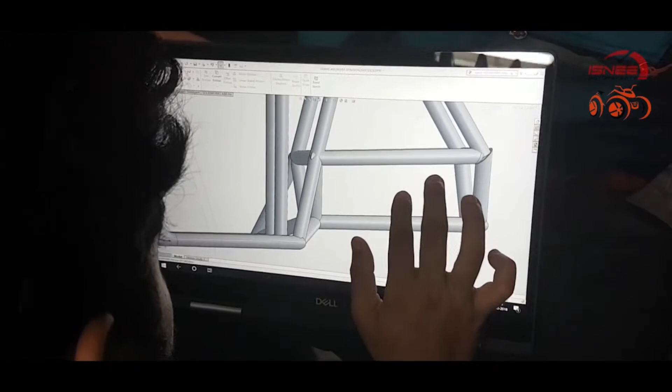A design competition for engineering students which challenges them to build an all-terrain vehicle capable of running on all kinds of surfaces, be it mud, sand, rocks, mountains, everywhere you go, the quad will go. Quad Torc is basically a design challenge for budding engineers in which they learn to design, they build the quad, they bring it for testing, they compete with other vehicles coming from across the nation, and people from various industries judge the vehicles based on design, manufacturing, performance, and dynamic tests.

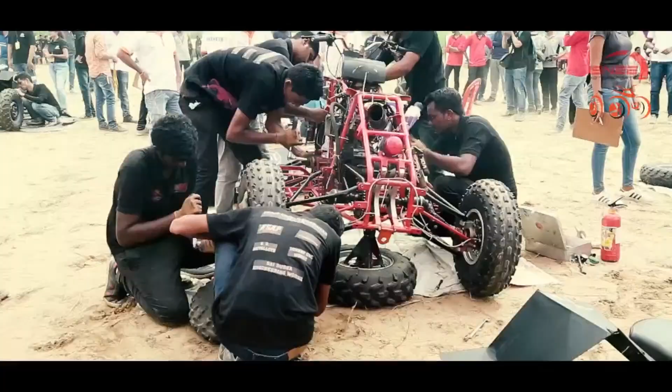A vehicle can run in dynamic events only if it clears the technical inspection and brake test. But before technical inspection, these ATVs need to clear a drop test where they are dropped from a height of 6 feet, which is really breathtaking, because if at this point the vehicle fails, it would be really hard to fix it. Design of any automotive or manufacturing depends upon various factors such as aesthetics, performance, and ergonomics.

Whenever we design something, we initially make a scale model of the design so that we can figure out exactly how our end product is going to look like, and we should design to make our vehicle structurally fit and able to take proper dynamic loads.

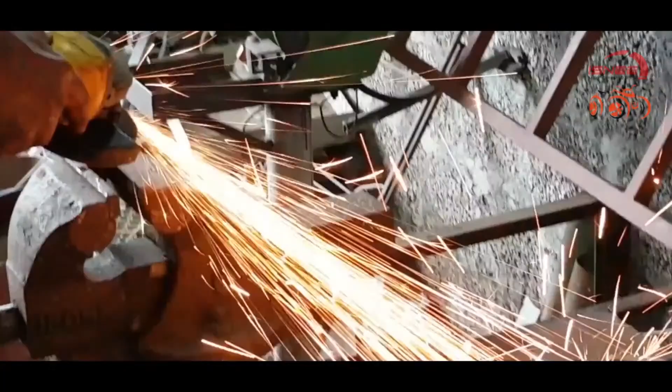If we consider manufacturing of a chassis, we consider various factors such as node-to-node triangulation of the entire chassis so that the entire load is distributed evenly over the chassis, and the damage or failure of any part is very rarely done.

Quad Talk, the off-road championship by ISNEE, I frankly joined engineering because of my passion for automobiles, and I found this amazing team and this amazing event. All that the college does is provide you with the theory, but this event and my team has provided me with real life experiences, so that I can be a problem solver when I go out of college. When I graduate and go to the industry, I'll be able to solve numerous sorts of problems that other people are not capable of solving.

Quad Talk has given me a complete adrenaline rush, not only from viewing those quads running on the tracks, but also as an engineer. I came across a lot of problems that we as a team had solved, and the satisfaction you get after solving all those problems was an amazing experience. So yeah, I really enjoyed the whole thing.

I'm from Team Hyperion, I'm a professor there at SBM Polytechnic. We are the first time participating in such an event. Though it's a polytechnic, we were a little apprehensive about how our team would participate, but...

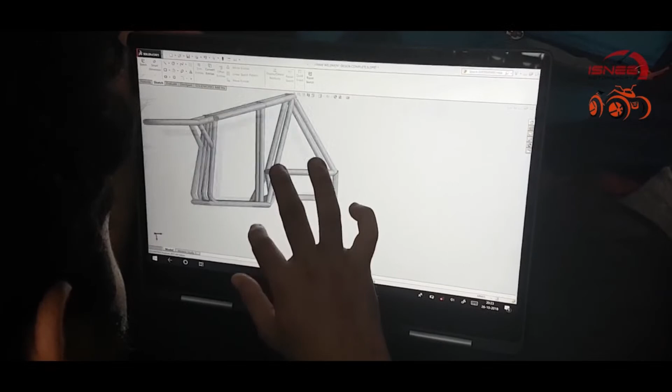A design competition for engineering students, which challenges them to build an all-terrain vehicle capable of running on all kinds of surfaces, be it mud, sand, rocks, or mountains. Everywhere you go, the quad will go. Quad Torc is a design challenge for budding engineers, in which they learn to design and build a quad, then bring it for testing. They compete with other vehicles from across the nation, and people from various industries judge the vehicles based on their design.

It's been 2 years since I've been coming to this event, Quad Talk. I'm here representing Team Technocrats, and this is my first year at ISNEE Quad Torc 2018. Manish, representing Team Legion from KCD. Mitesh from Team Hyperion. Very happy being here, a healthy competition.

Quad Talk can't be described just in words. It's more of a feeling that one can perceive by being a part of it. An intensive design competition that needs passion, dedication, and determination. A challenge that takes almost a year to design and build a vehicle fit for the competition. And finally, all the ATVs arrive on the racetrack to prove their mettle.

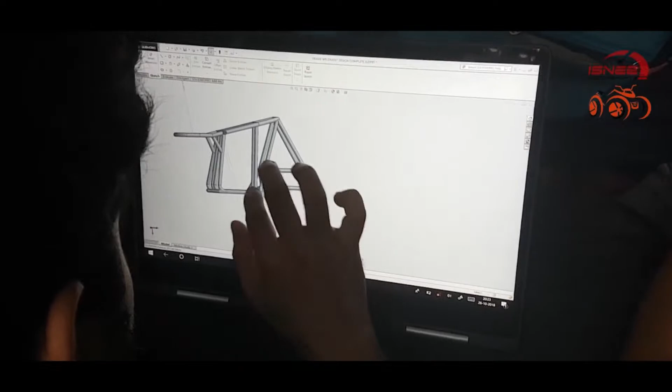A design competition for engineering students, which challenges them to build an all-terrain vehicle capable of running on all kinds of surfaces, be it mud, sand, rocks, or mountains. Everywhere you go, the quad will go. Quad Torc is a design challenge for budding engineers, in which they learn to design and build a quad, then bring it for testing. They compete with other vehicles from across the nation, and people from various industries judge the vehicles based on design, manufacturing, performance, and dynamic tests.

A vehicle can run in dynamic events only if it clears the technical inspection and brake test. But before technical inspection, these ATVs need to clear a drop test where they are dropped from a height of 6 feet, which is really breathtaking, because if at this point the vehicle fails, it would be really hard to fix it.

Design of any automotive or manufacturing depends upon various factors such as aesthetics, performance, and ergonomics. Whenever we design something, we initially make a scale model so we can figure out exactly how our end product is going to look, and we design to make our vehicle structurally fit and able to take proper dynamic loads.

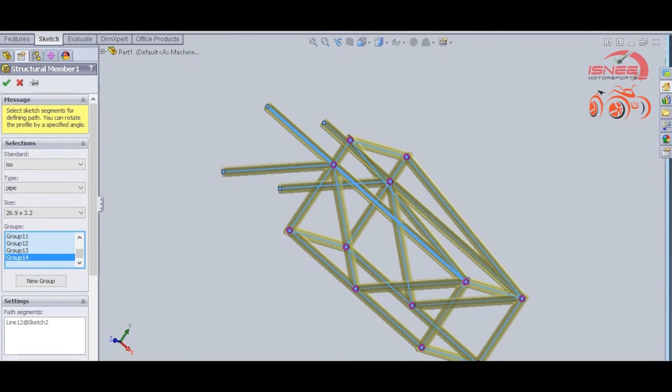If we consider manufacturing of a chassis, we consider various factors such as node-to-node triangulation of the entire chassis so that the entire load is distributed evenly, and the damage or failure of any part is very rarely done.

Quad Talk, the off-road championship by ISNEE—I frankly joined engineering because of my passion for automobiles, and I found this amazing team and this amazing event. All that college does is provide you with the theory, but this event and my team have provided me with real life experiences, so that I can be a problem solver when I go out of college. When I'm a graduate and go into the industry, I'll be able to solve numerous problems that other people are not capable of solving.

Quad Talk has given me an adrenaline rush, not only from viewing those quads running on the tracks, but also as an engineer. I came across a lot of problems that we as a team had solved, and the satisfaction you get after solving all those problems was an amazing experience. So yeah, I really enjoyed the whole thing.

I'm from Team Hyperion. I'm a professor at SBM Polytechnic. We are participating in such an event for the first time. Though it's a polytechnic, we were a little apprehensive about how our team would participate. But right from the beginning, our team manager, team members, principal, and all the management people were very supportive, and they gave us a great boost from the start, which motivated all our students, and they worked very hard.

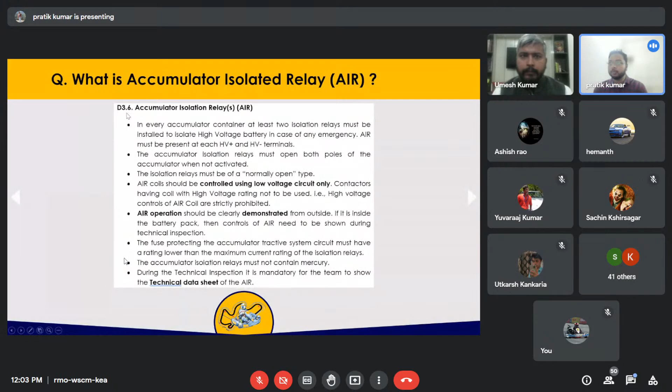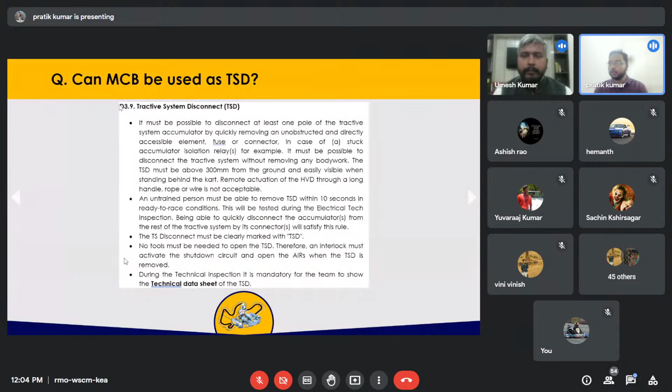Now the next question: what is HVD? In one place it is mentioned as HVD in the rule book. HVD is high voltage disconnect, which is nothing but the synonymous word for TSD, tractive system disconnect. So tractive system disconnect and high voltage disconnect are pretty similar, you can consider it in this way.

Coming to the next question: can we add supercapacitor along with battery? Yes, we are allowing supercapacitor. It is possible to use it in parallel, in whatever configuration you want, along with battery or anything. But it should adhere to the rule book mentioned for the accumulator. That is the only condition here.

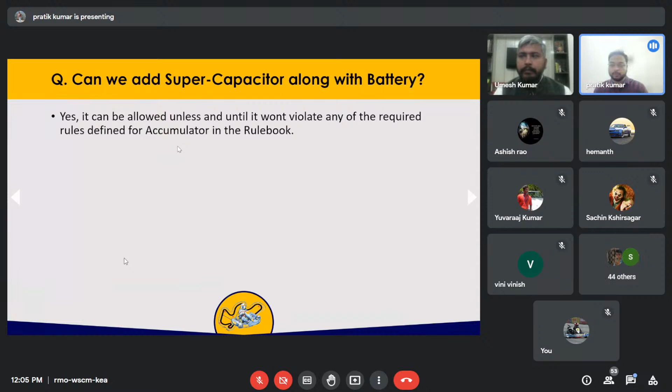Moving to the next question: what is the GLV system ground? GLV stands for ground low voltage. Those working with electrical systems are aware of the chassis ground. So GLV system ground is nothing but the chassis ground for low voltage systems.

Moving to the next one: for PSS, power shutdown switch, any specific company requirement? Similarly, for this also we don't have any specific company name or something. The only requirement is it should adhere to rule D3.15. This is a sample picture, you can say the PSS should be looking something like this. You can use any company, there is no restriction. That's all.

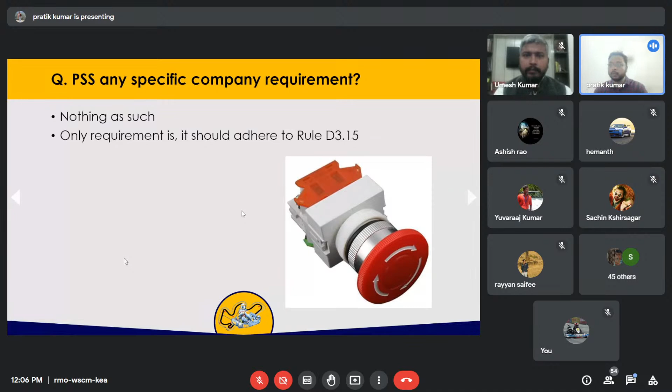Moving to the next one: what is the reference position for the second PSS switch? I want to add one point here, this is the new rule added for this 10th GKDC, it was not previously there. It is mentioned in D3.15: there must be two PSS or kill switches in the kart. The first PSS must be rigidly mounted on the steering wheel where the driver can easily operate it, and the second PSS switch should be placed on the left side of the vehicle on the roll hoop at an adequate height such that in an emergency situation the bystander can operate it easily. The PSS must be easily visible to someone standing near the kart.

So PSS should look like this, and one should be placed on the steering wheel for the driver, and the second one on the left side of the roll hoop. If suppose this is the car, so somewhere near the driver back, left side of the roll hoop, should be used. I think a diagram is also present somewhere. Let me check if I can show you by end of this session, the exact place where it should be mounted.

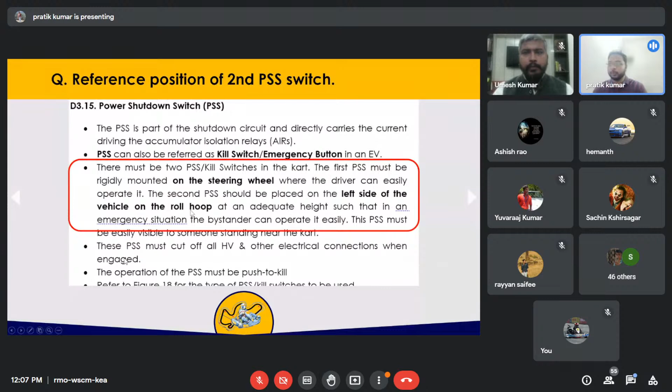Now we'll move to the next question: accumulator container specific thickness. There is no such boundary on what exact material you should be using. We have the requirement D3.4 and D3.5 for the accumulator container, so you should adhere to that. Apart from that, you are free to choose any material, as long as it adheres to these rules. It should be rigidly mounted, and all rules followed. You can refer to these two things, 3.4 and 3.5.

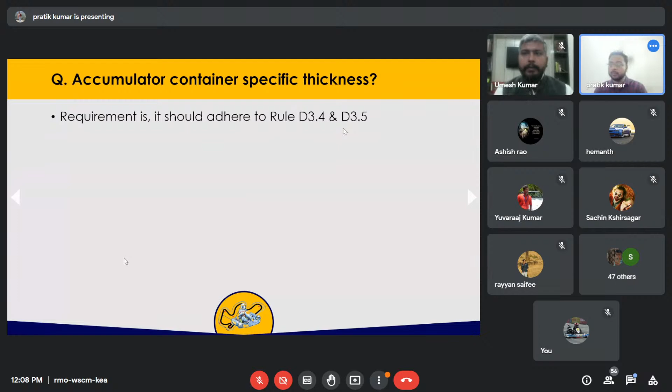Going to the next one, about the BOTS, brake-over-travel switch. Any specific company requirement? There is nothing as such. The only requirement is it should adhere to rule C2.19. This is a sample picture of how it should look, but it can be anything else also, like the PSS switch you are using. Those kind of devices can also be used as a BOTS. Only thing you need to consider is that C2.19 should be fulfilled. That is about the BOTS.

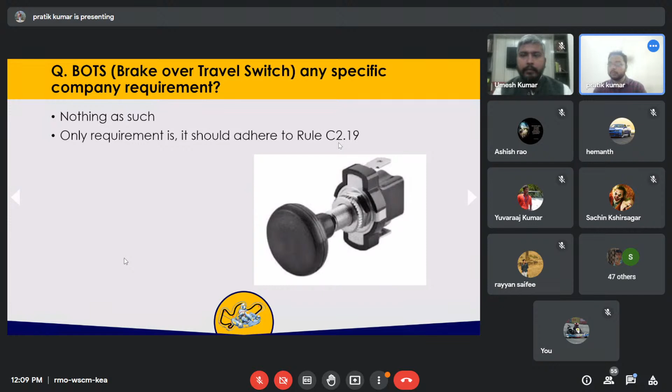The next one, I think the last one: someone asked to please explain the low voltage shutdown circuit diagram. It's a new thing recently added to the 10th GKDC rulebook. Before going to the exact diagram, I want to discuss why this is necessary. What are the different types of circuit? What's the difference between low voltage and high voltage? In any EV, when designing, there are basically two parts: one is the high voltage section, used to power the tractive system, and the second is the low voltage, which operates the driver or other control circuitry. The low voltage circuit diagram is also known as the shutdown circuit, because if something happens to this low voltage circuit, your high voltage circuit will finally be disconnected, through the AIR, the accumulator isolation relay.

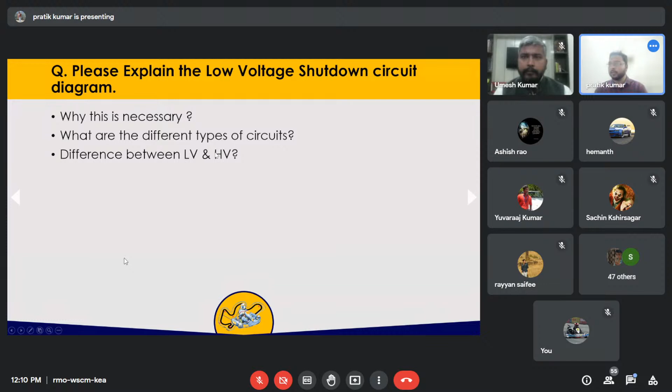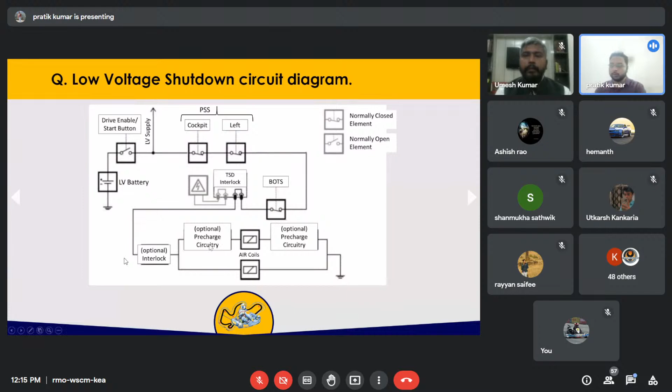And after that, it will split up into two parts. One will go to the AIR, suppose the top one is for the positive terminal of the accumulator, and second one is for the negative terminal of the accumulator. So first one will go here, or you are free to use any pre-charge circuitry also for EGKDC. This is not a mandatory rule, but if you want for a safety purpose, you are free to use any pre-charge circuitry if you require. It can be placed here as per the diagram.

And the second one is again the optional pre-charge circuitry, you can add here also, that is not an issue. As per your design, you are free to choose anything. And the second part is completely for the negative part of the AIR.

So now I think I'm done with the electrical related queries. If anyone from the audience is having any query, they are free to ask me.

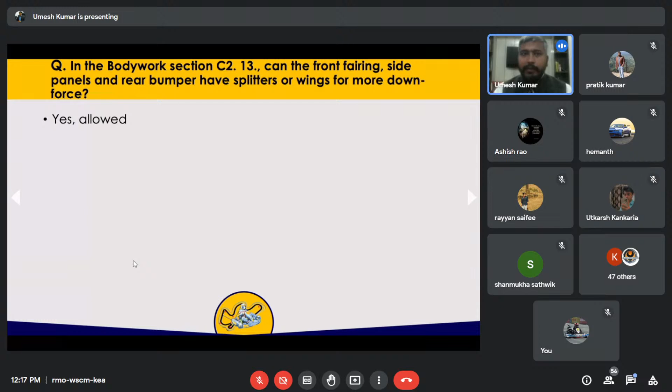Then, are adjustable aerodynamic packages allowed in the bodywork? Yes, they are allowed. But make sure when you talk about the aerodynamic packages, you have a proper report. It should not be like you attached anything, if that is not working, if that is just for the aesthetic or better looking, that's okay, no issues. But when you claim that you have the active aerodynamic, meaning it is working, then you would need to present the reports as well.

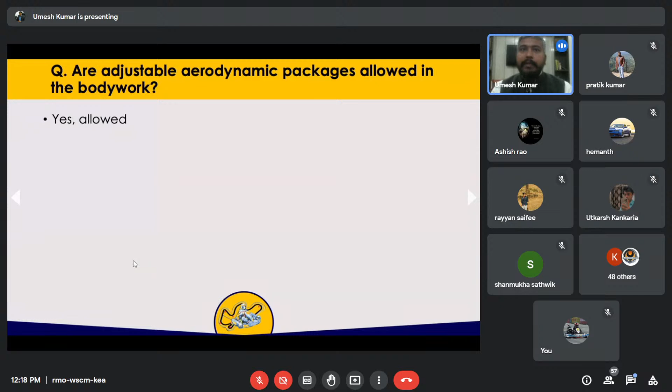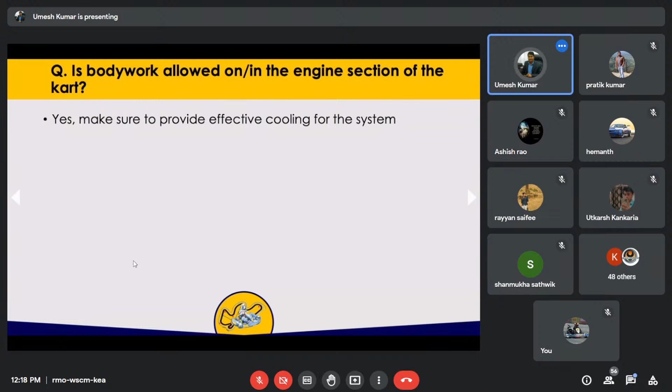Is the bodywork allowed on the engine section of the kart? Yes, you can do bodywork on the engine or motor section, and the transmission section also. But if you're covering it up entirely, make sure that you provide effective cooling to the system, so that no heating problems happen.

Are rear spoilers allowed in GKDC? Yes, allowed. Then we have, what are weldment joints?

Actually, this should not be a query for teams participating in a competition like this, but okay - a weldment joint is nothing but a joint that you are welding in your frame or anywhere else. So anything that you are welding is a weldment, basically a welded joint.

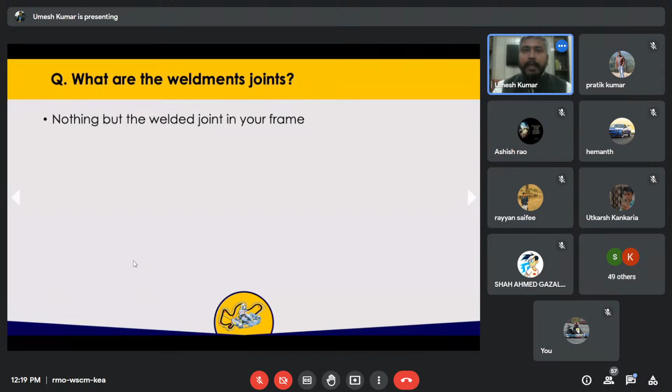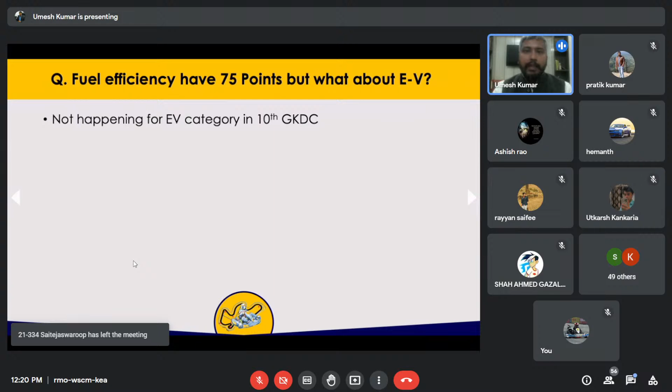Fuel efficiency has 75 points, but what about EV? Unfortunately, for the electric category, we still don't have access to reliable systems to measure efficiency, so we would be dependent on several factors that teams can manipulate very easily. We are testing a setup in this event that will not be included in the scoring, to evaluate battery efficiency precisely in a way that cannot be manipulated easily by the team. So for this event, there is no efficiency event for the electric cars, but for the combustion cars, it is already there as per the rules.

Compulsion of minimum 3 drivers - yes, the rule book says you need to have 3 drivers. The reason is that sometimes when the event happens, the driver is ill or not feeling well, or the driver is not present at the venue. At that time you randomly pick a driver from your team, and that becomes a safety issue for the competition. So we strongly recommend having 3 drivers, all with a better relationship with your vehicle rather than someone picked randomly.

What is the timeline for doing things, like when can we start the fabrication? You can start the fabrication right away. There is no need to wait for any signal from the organizers. If you have the right kind of design you are aiming to build, start the fabrication right away.

No waiting. Next question: one driver has completed his training - is the remaining 2 enough to get DTP, or should all 3 attend the training? If anybody has completed the driver training program in previous events, they don't need to attend it again since they already have the certificate. But what they do need is better experience, so if they want, they can attend, but there is no compulsion.

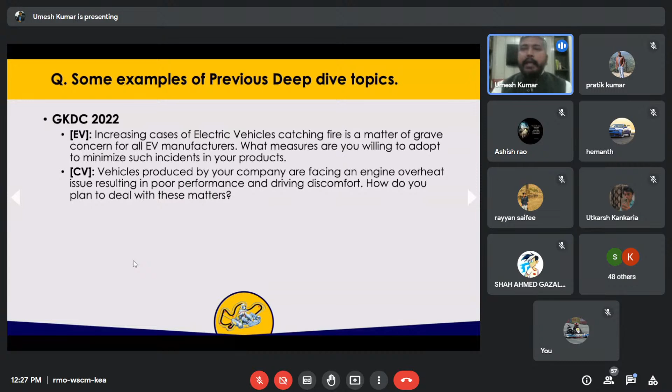Now, business plan executive summary. If you see your team account under the resources tab, there are several templates uploaded, and one of those templates is for the BPS, or business plan executive summary. It is basically nothing but a document that you are submitting to the competition in order to obtain an appointment with the judges.

So though everyone will be given a chance to present their business plan, this document has certain points, irrespective of your performance in the business plan presentation. Based on this document, we'll be interested to hear your complete business plan. Be as creative as you can, and try to showcase the highlights of the business. It is just a single page document, not a detailed report.

The contents required, what we think is potential content for your BPS, has already been given in the template. You can include things on your own also that you think are more important to mention. You can refer to the EMS, and under your team account there is a tab named resources, where all the templates are uploaded.

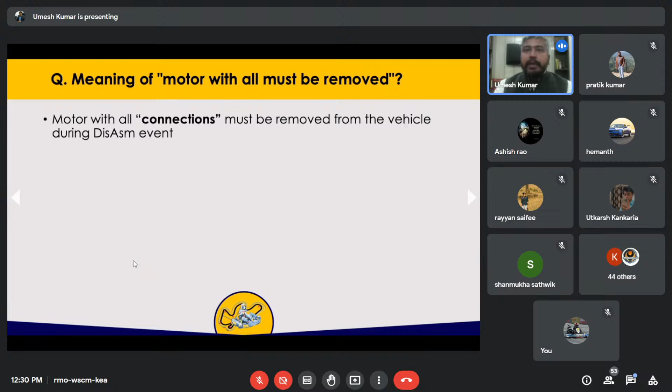There was a question about the meaning of 'motor with all must be removed.' Thank you for finding this error out. There is a word missing: 'motor with all connections.' So basically when you are doing the disassemble event, when you are taking the motor out of the kart, all connections must also be removed. It should not be like you took the motor out but left the wires connected and put it on ground. No, all connections of the motor must be removed. When designing your wiring system, make sure you use couplers, not wires attached with insulation tape. Couplers can be removed very easily and quickly, and it does not harm your system.

The next question is about business plan presentation being online, and whether all members must be in the podium area. Actually, the business plan presentation will be online, but the top 3 or top 5 presentations will again be done during the event. All members involved in the presentation, when it is happening online, must keep their camera on at all times during the presentation. If you are selected as top 3 or top 5, that is yet to be decided, and if you get an invitation to present your business plan at the event, the podium area is simply the presentation area where you stand to present.

What are the requirements for the technical inspection report specification? First, when studying the rule book, which I hope you all have been doing carefully and thoroughly, note that there is no such term as 'technical inspection report specification.' There is a technical inspection sheet, which will be made available to you at least 2 months before your in-house TI deadline. So when you ask a question, please mention the right term so we do not get confused about what you are asking.

What factors decide to call a kart unstable? Even if you have cleared technical inspection and entered the dynamic events, the first event would be the brake test. The technical inspectors or judges have the right to declare your cart unsafe or unstable based on several factors. One factor is unusual sound from the transmission, engine, or motor. If we find an unusual sound that is not normal coming from your system, your cart may be stopped and your TI sticker can be taken back.

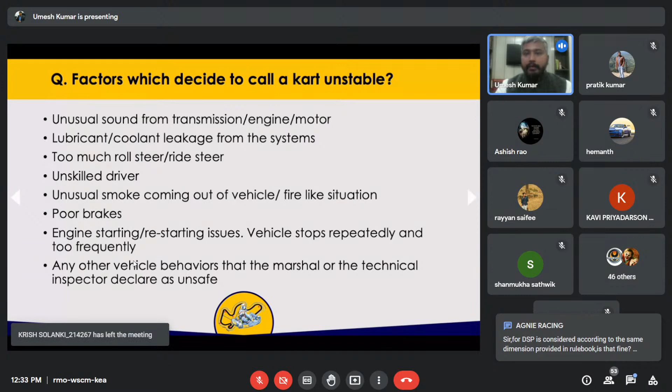Electronic timing equipment mounting position. So basically, when we speak about mounting position, we mean the mounting position of the transponder. Based upon the facility of the electronic timing system, we will decide whether to use the transponders or not.

If this happens, we will do the installation part on our own, and that is not going to take any additional mounting or space design in your kart. So we'll find systems in place that we can install the transponder without anything else required.

So what is the minimum thickness for the chain guard? Again, there was a question, what is the minimum thickness for the transmission cover? So there is no such rule for the thickness.

You have to be smart enough to design this thickness. It must be a robust one, like it should not be that it is not able to withstand the forces or the dynamic conditions it is supposed to. Suppose your chain breaks, and if you are using a material with a thickness of 0.5 mm or 0.8 mm, when the chain breaks, it has a force that can pierce through that material, so it is of no use. So select a system, select a thickness or material smartly.

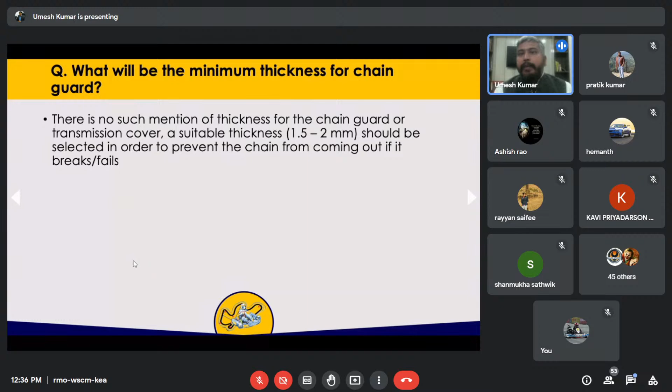And if you are using a stamping tool or anything of that sort, then less thickness can also work. But when you are making a system for your use and do not know the exact requirement, you should go a little higher, and it should basically fulfill the requirement. So you have to be smart while deciding the thickness.

Now, seat mounting angle as per the driver sitting posture in rule C2.11. This has been a very unfortunate thing - even after repeatedly saying and forcing teams to adapt a particular driver sitting posture, they make a vehicle so compact that the driver itself is not able to sit comfortably or safely inside the vehicle.

If you happen to see the rule book, there is a Percy defined in it, and that Percy is nothing but a driver according to which this kart is supposed to be designed. So you have already been given a driver dimension, and according to that you have to manufacture or design this kart. Then the second thing is your drivers might not be fitting in that Percy.

They can be taller or shorter - that's not an issue. If that is the case, you can have adjustability in your driver sitting posture. You can adjust the position of the pedals, or the position of your seat, or both as required.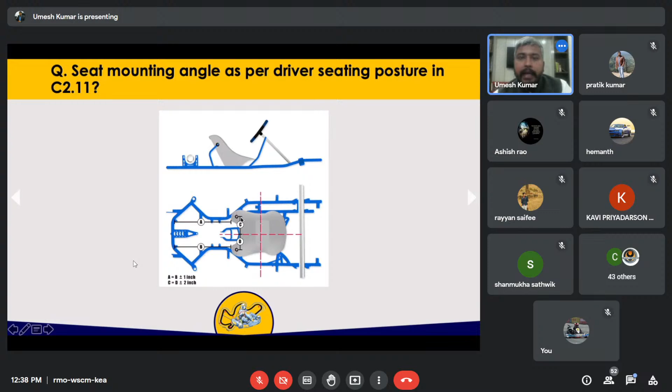Then again, the second thing is C and D. If you see the centers, this distance C and this distance D can be plus minus 2 inches greater or smaller than each other. So this is basically the definition of this particular rule.

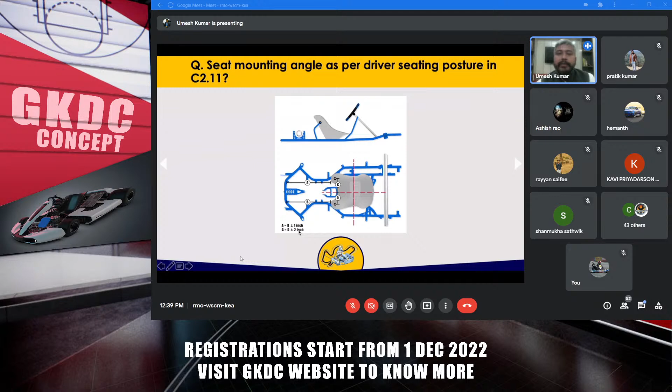So you can have a seat offset from the center, but the range is A and B plus minus 1 inch, C and D plus minus 2 inch. This is what this particular rule is saying.

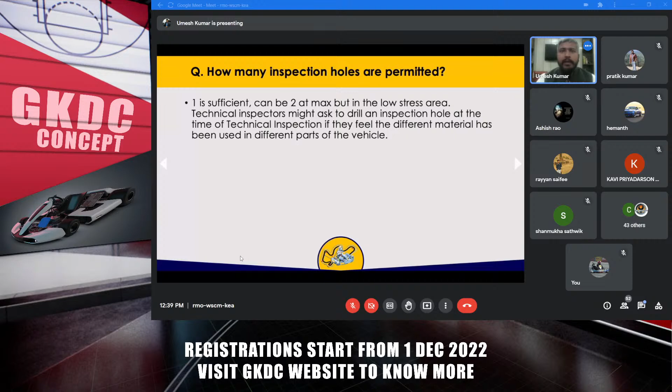Now coming to the next question, how many inspection holes are permitted? Mostly there is only one inspection hole, and this is to check the thickness of the material you have used. It must be in a low stress area where there's no impact, and the diameter of this hole can be 3 to 5 mm, not more than 5 mm. 3 mm is more than sufficient. So maximum 2 holes you can make, but 1 is sufficient.

Judging criteria for the aesthetic report - in the competition handbook, you will get guidelines not only for aesthetics but for every evaluation we are doing, including design evaluation, DVP, DFMA, and whatever reports you are submitting. A few important tentative questions are listed there, and same for aesthetics. I'll read out those questions for you.

Is the overall appearance attractive? First question. Does the kart look fast and stable? Next question. Is there any inspiration for that particular design, or did you randomly start manufacturing and whatever you got was the design? And the next question would be, does the kart exhibit high levels of fit and finish?

Then next, is the kart clean? I mean, when you present it for evaluation, how is the cart looking? Is it clean, washed, free of oils, grease, and debris?

Then the next question is, does the kart instill pride in driver, owner, or team sponsors? This is a very important question.

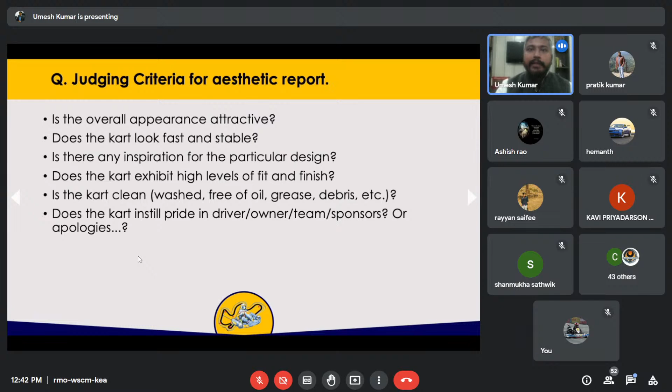Now, this was what I was trying to attach with that sitting seat position. This is the exact meaning of 5th percentile and 30th percentile anthropometric data. Basically, it is nothing but the driver's dimensions, like leg length, thigh length, back length, and neck length.

What are the places where we are going to put this Percy? So we call it Percy - Percy is nothing but your driver, according to which the kart is being designed. This Percy is a 30th percentile male template, which is 5 foot 8 inch to 5 foot 9 inch for Asian people. Since we are in India, we are Asian, and our average height is approximately this in karting.

And for the formula student event, it is 95th percentile, which is approximately 6 feet 2 inch. So for go-kart, for GKDC, we are taking a driver of 5 foot 8 inch to 5 foot 9 inch.

Now you can appoint anyone as a driver, but this is the particular driver according to which your kart is being designed. You see, the helmet is declared here at the diameter, and this is the shoulder diameter, and this is the hips part, this is knee, and this is the ankle joint. Everything is mentioned over here. You need not do anything but make a Percy out of cardboard.

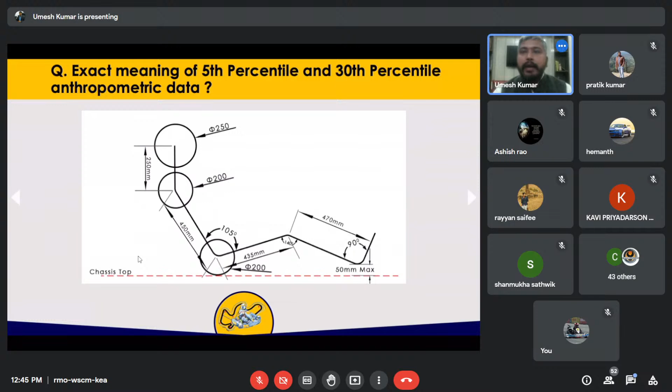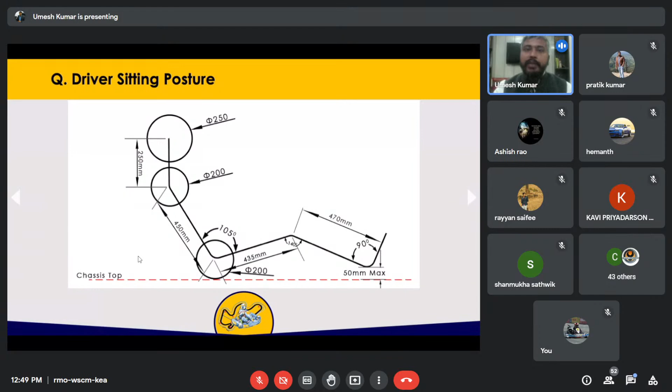Driver sitting posture, again, same thing. Now, with the help of some additional examples, I will again try to explain you the driver sitting posture. Please be patient for a couple of more minutes.

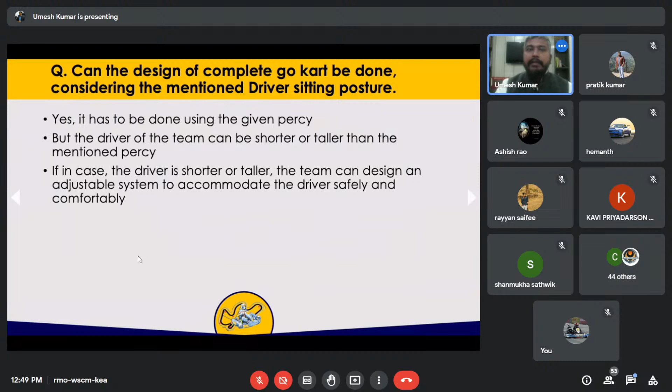Can the design of the complete go-kart be done considering the mentioned driver sitting posture? Yes, of course, this is the only criteria for you to design the kart. It has to be done using the given Percy only. But the driver of your team can be shorter or taller than the mentioned Percy. If the driver is shorter or taller, the team can design an adjustable system to accommodate the driver safely and comfortably. So this is how we come to an end for the questions being asked.

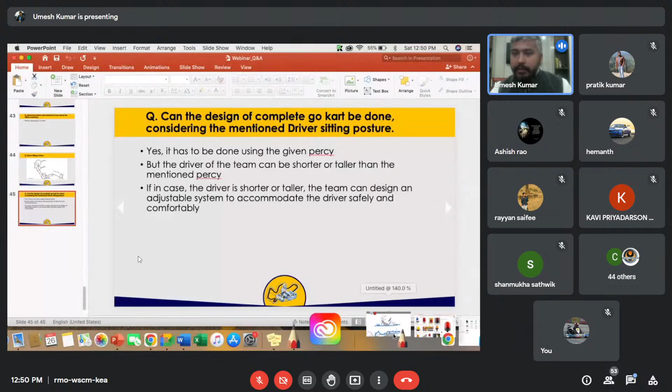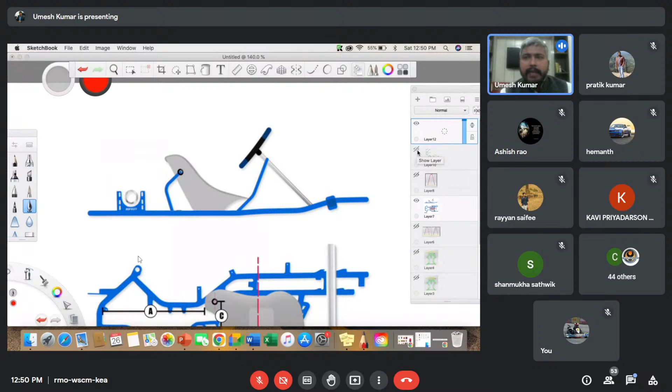Now there is one thing I want to explain further. This is your kart. If I show you your kart, if you are able to see my screen, this is nothing but your kart. Now over here will be your driver. So if I place this Percy, you see I have not mentioned any dimensions of this kart as of now. So if I place the Percy over here, you will see the driver is sitting over here. He's having his shoulder somewhere over here, and this is the approximate position of your driver if he is having this much of length.

Make sure that we will not ask anybody to sit when we do this test, or check the sitting posture. We will not make anybody sit, but we will put the template inside your kart, this very template made of cardboard only, and we will see this is where your pedals will be positioned inside the seat and placed like this.

So we will see if this angle is 140 degrees. If this is not 140 degrees, then basically minimum 140 degrees. So if it is more than 140, no issues. But if it is 130 also, then we are going to disqualify you in the technical inspection.

And in the recent last event also, 40% design penalty was kept on the teams, those who were not able to satisfy this particular rule and this particular rule.

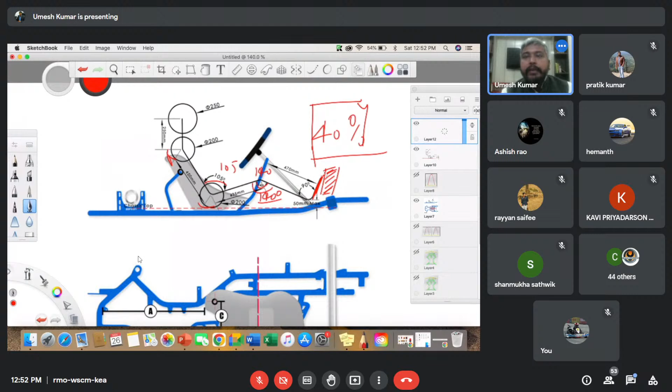So when your driver is taller, obviously this angle will not be 140 degrees. If these systems are not adjustable, that is acceptable, no issues. But in order to make this particular template fit in your vehicle comfortably, and to satisfy this as 140 degrees, this as 105 degrees, and this as 90 degrees, you must need to make this template first and then start your designing. If it is more than these angles, that's fine, no issues, but not less than this.

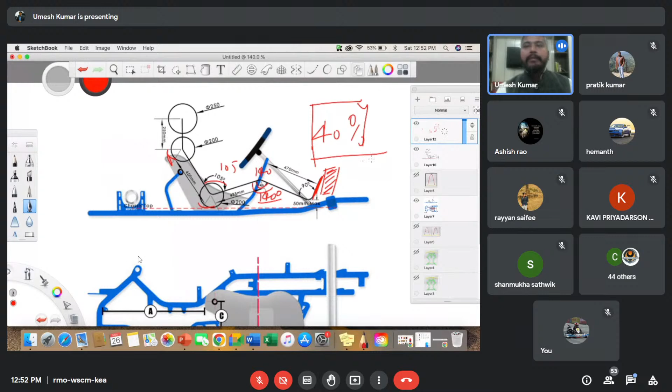Okay, so this is how all the queries are addressed. Now there were two things that I personally wanted to tell you. One about the TSAL, that people use anything in the name of TSAL.

So I'll just show you something like a warning light beacon that you use on ambulances and forklifts or cranes or anything. So it is a warning light beacon actually. This would solve your purpose of the TSAL. If you can find it on the internet, if you can see on my screen, it should not be very big, or you can make one of your own.

Now, sometimes for the tractive system disconnect or the high voltage disconnect, teams use the fuse that we use in domestic electrical systems. That is okay. For the sake of the trouble, we allow this only. But this is not a professional thing, though it is also used for that kind of thing only, but it is more safe, like everything is about safety.

So this is a typical tractive system disconnect. If you can see on my screen, this is something which is a tractive system disconnect that you can use in your system, in your kart, and that will work fine.

So for any other things other than these, we'll be happy to answer if you have any more doubts. I think there are some queries in the comment section actually. Since I was presenting the team on the screen, I did not see. I'll just read out the queries.

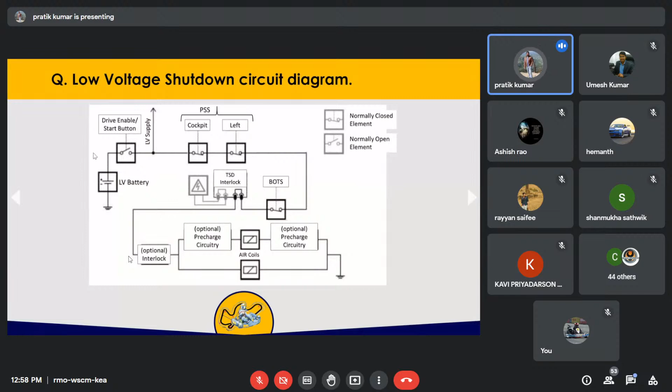I hope you can see this now. So basically, to answer your question, yes, it is compulsory that the LV circuit must be done on the kart. The compulsory part is that after the battery, it must go to the start button. That is mandatory. Before this start button, or somewhere, you cannot take the LV supply for any of the functions.

So this is mandatory: the PSS (power shutdown switch), BOTS, and interlocks. It should only be one independent sequence. All these components should actually be present, TSD and BOTS, but you may play around with the sequence. So all things were in series, right? You only have the freedom to change the sequence, that's all. But these were the mandatory things.

These anyhow need to be incorporated in the kart, so this is compulsory. And you asked, can we edit it according to our use? So to answer that, only the sequence can be changed. Apart from that, you are not allowed to change anything. If you want to add additional things, you can add them. But these five were mandatory: the start button, cockpit, left cockpit PSS, TSD interlock, and BOTS. I hope this is clear. If not, if you have any specific query, you can ask.

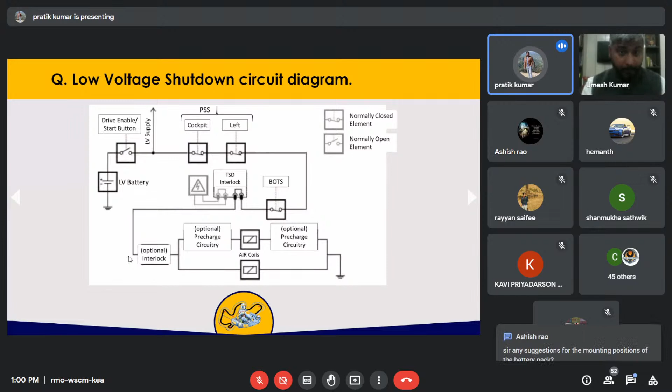And I think after that, one more question: should we only use a brand new battery and motor? Battery and motor were not something that should be very cheap or anything like that. You are basically allowed to use battery and motor from the last year. You can specifically reuse them. If you think your battery is fulfilling your endurance requirement, then yes, you can use it. So reusing is not restricted.

Shri Arvind is asking, what do you mean by team account? I'm very... this is very unfortunate to read this. What do you mean by the team account? Team account is nothing but your team is given an account on the website, the GKDC website, where we establish communication.

In regards of the competition, like if there is any announcement, if we are asking you to do some work in a specific manner, then you have to do it in reference to those announcements. There are several things like team member information that is to be uploaded in your team account.

The templates are uploaded over there, results are uploaded over there, and a lot of things are uploaded over there. So basically something like your social media account is your team account, which is accessed by you. You can ask your team manager or team captain or someone who's having those credentials what exactly is happening over there. It is an information for all of you that you please be updated with your team account. Don't expect that everything is to be spoon-fed by calling you only. There are certain announcements and notifications that we put on the team account, under my messages, under resources. So you are supposed to see that.

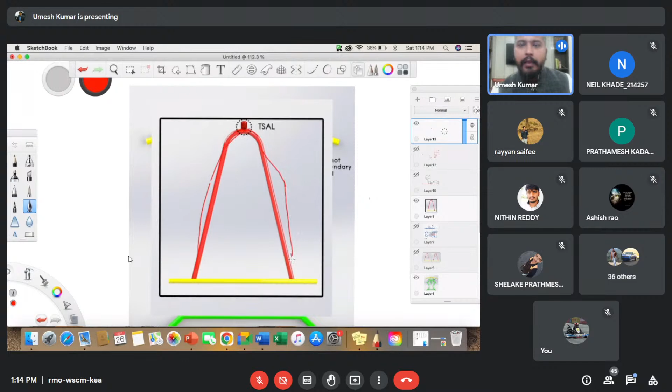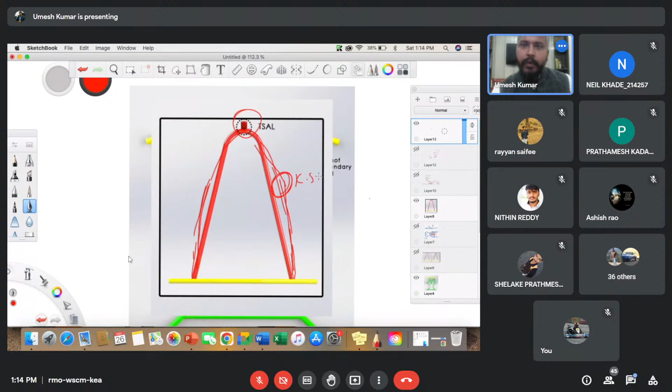I'll show you—it can be something like this also. But you have to minimize the drag, so you can do it any way that you find aesthetically appealing for your kart while fulfilling the requirement. So over here is going to be the TSAL, and somewhere over here is going to be the kill switch or the PSS. So this is your roll hoop.

Now I was discussing the other thing, the driver head clearance. So this is the tallest driver. When he sits in the kart, there should be at least 2.5-inch clearance between the top of the roll hoop and the top of the helmet. And over here will be the TSAL.

Now the roll hoop has been incorporated just for these two things. Earlier there was no compulsion for the roll hoop, so teams were not able to mount the TSAL in a visible position where we can see it from all directions. Now it will be possible, and the location of the secondary kill switch, which was not specified particularly before, is now specified to be over here.

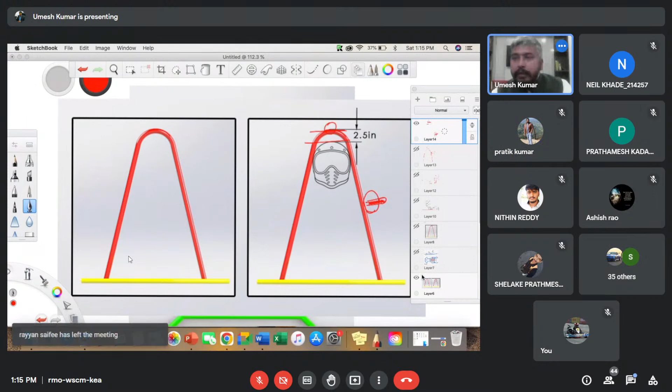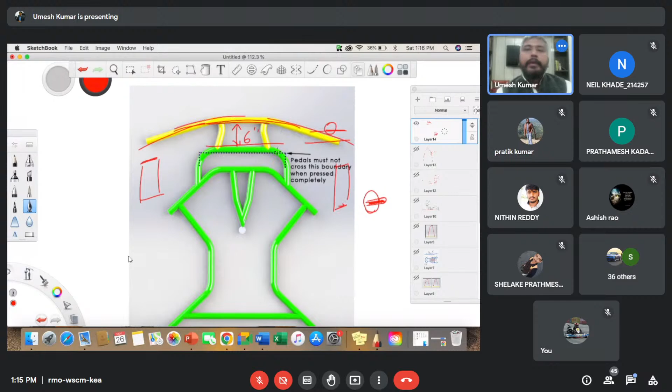So this is about the roll hoops, and the second thing is the chassis sections. This is the crushable zone, and this length should be 6 inches. The width is not specified—it can extend up to your tires. These are your tires, so it can extend like this. This is the crushable zone.

Make sure that you do not need to worry about the wheelbase or the track width. It is not making any difference in your wheelbase or track width, as the wheels will be connected somewhere over here. So when you see that your chassis length is increasing, yes it is increasing, but your performance of the vehicle is not being affected.

Now even if any impact is happening and your crushable zone is withstanding that impact, so your pedals are over here, like brake pedal, maybe if you have the clutch pedal also, and your accelerator pedal also over here, A, B, C, or whatever sequence you have, accelerator, brake, and clutch.

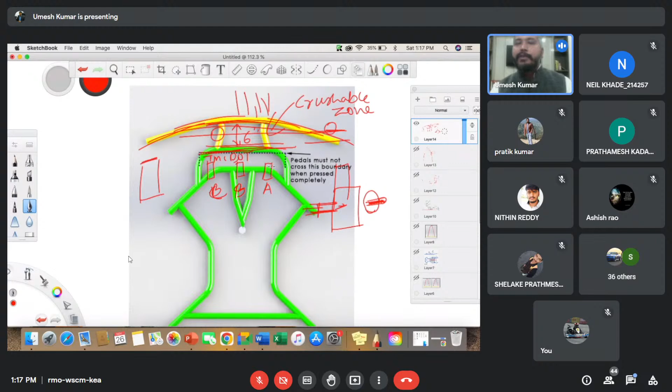So these systems, basically like your master cylinder, TMC, or your BOT, or any other system which is a part of your kart and makes it running, should not be in the crushable zone, except these members which are meant to be a part of the crushable zone. Everything should be behind this particular point.

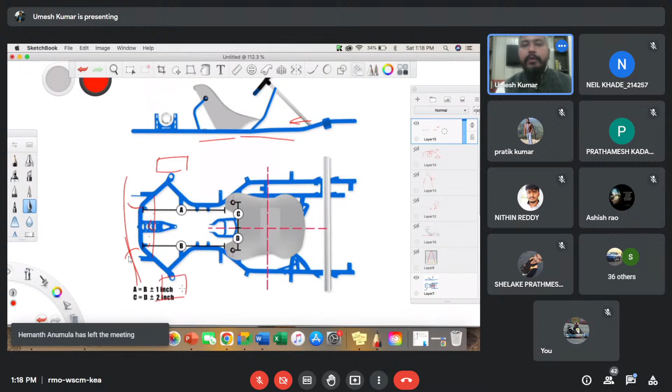So your pedal assembly area, if I show you in this particular thing, it's nothing but the same thing. This is the pedal area, and over here will be your crushable zone. Pedals will be somewhere over here, and your driver is sitting like this. So the wheels will be somewhere over here, and this is how you will be placing the driver. I hope the questions are now clear.

Can you elaborate about the rule for brake switch, jamming, locking all 4 tires? First of all, it is...

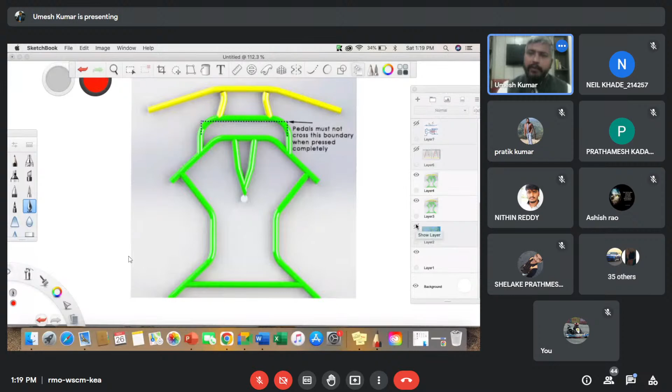Very rarely seen in the go-kart, but yes, you can have brakes on all 4 wheels, and in order to do that you will need to design a brake system exclusively for your front wheels, and this is a part to be researched and designed. Or if you want to spare a lot of cost, then brake systems are available that you can install in the front wheels also. Otherwise, you always have brakes on the rear drive shaft only in a go-kart in GKDC.

Just one sec. So let's say this is your drive shaft. These are 2 wheels. So brake is always on this particular shaft. Not always, I should say, most often.

But if you are planning to incorporate brakes in the front wheels also, then you will have to design the stub axle in such a way that it can host the following things, like your caliper and the housing of the caliper and the rotor. These things should be able to mount on that. So this will just make the system a little complex, but it is possible and being used in professional racing karts. So you can try and look over there.